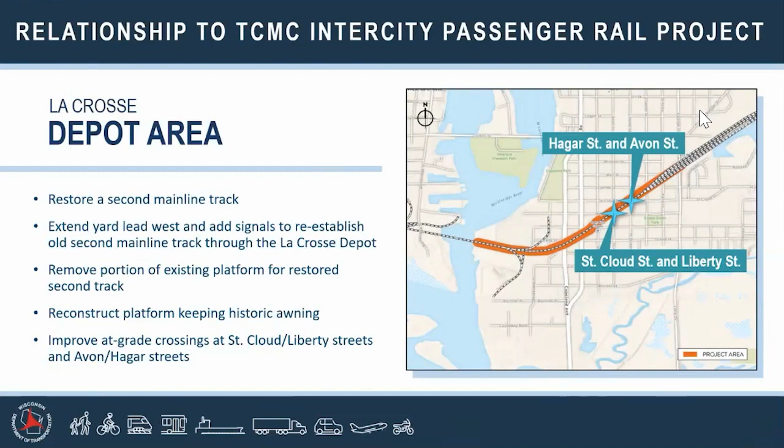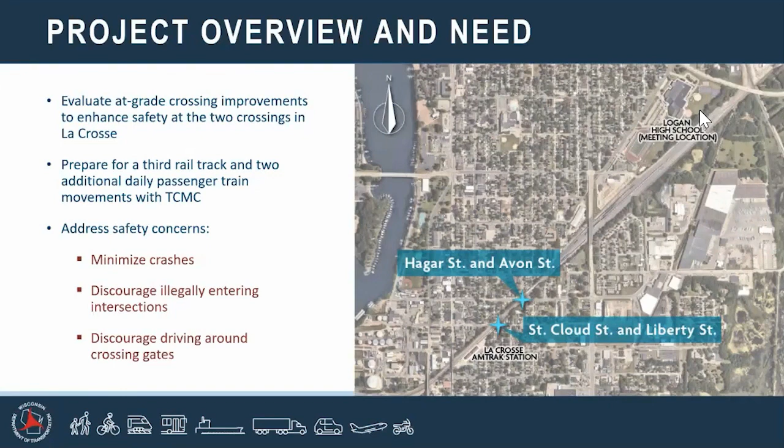So coming back to these at-grade crossings specifically, Chris, I know you're going to talk a little bit about some of the existing conditions and characteristics, but when we were out there, a lot of the folks understood that these two at-grade crossings have some safety concerns. We understand that the rail traffic is blocking these crossings. In talking with CPKC, we recognize some of that. They're also uncontrolled intersections right now. So with that, I'm going to turn it over to you, Chris, to talk a little bit about those existing conditions and characteristics.

One of the biggest important things about these two intersections is, as you know, as local residents, they're neatly sandwiched between a station and a yard. So you've got a lot of train movements. And so that's one of the primary things we are dealing with as we talk about these crossings and the safety issues that we have and the solutions that we are looking to identify.

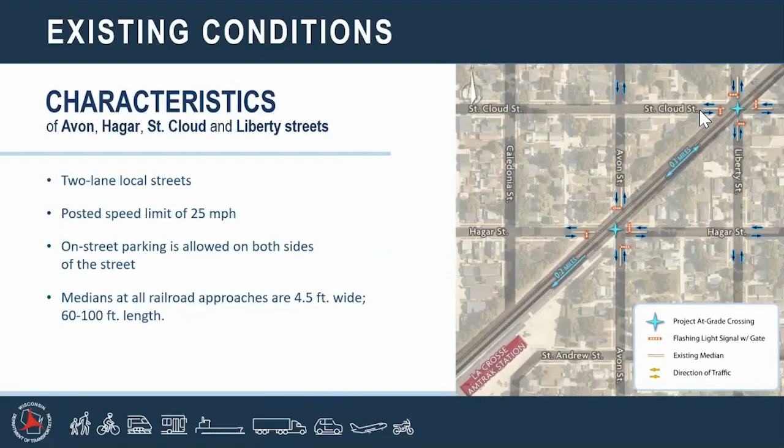We're talking about a residential grid, as you know, 25-mile-an-hour streets. As Aaron mentioned, no stop signs right now. Parking is allowed. There are medians. Currently they're in the range of 60 to 100 feet long. That doesn't tend to necessarily deter people from driving around those medians because they recognize, oh geez, if I don't race around that median, I'm going to be waiting here for minutes at a time. So those are some of the things that are in the existing geometry at both of the Avon Hagar, Liberty St. Cloud intersections.

What also is there from a railroad safety standpoint is there are lights and gates at each of these crossings. In each approaching direction, there are gates, as you know. No wayside controls. Down below here on the slide, you see a little statistics about the traffic. And you can see Avon Hagar and Liberty St. Cloud, the numbers there. I won't go through them, but you can see them. And as Aaron said, you can access these reports after the meeting if you wish.

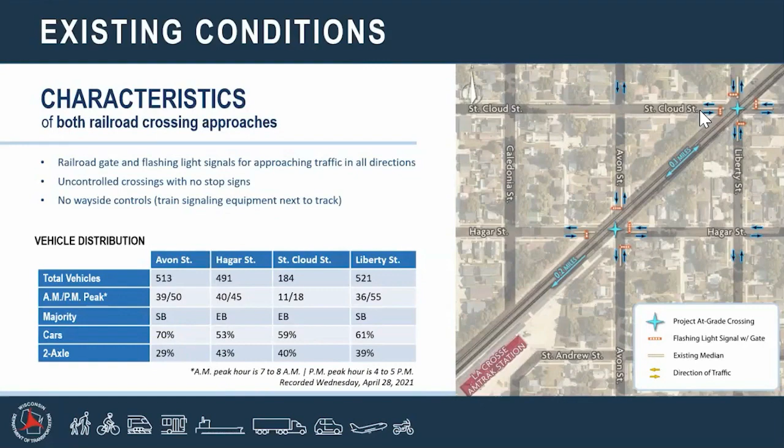Now going into the railroad conditions. As you know, there are many activations. Joanna Bush was the engineer that did this analysis for us. She couldn't make it tonight, as Aaron said, but she worked with the railroad to get some really compelling activation data, meaning she wanted to look at how often those lights and gates are going off, and how much during the day is that happening? How often are those gates down and closed? And the numbers are pretty compelling.

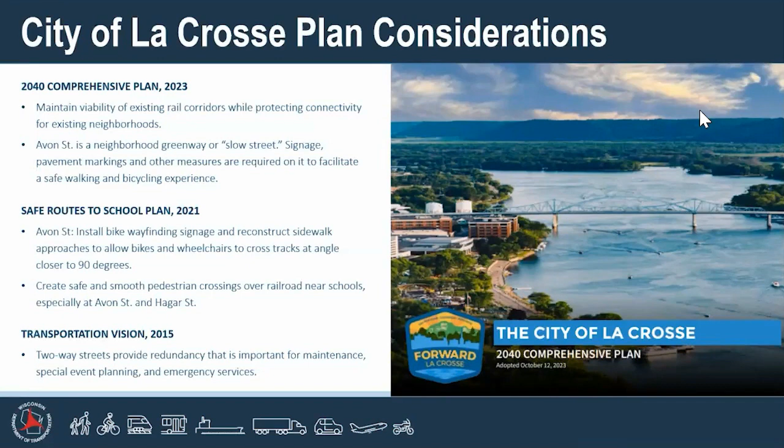Okay, so what we'll do next is we'll step into the alternatives that we've identified. And as we talk through this, I want to remind you that these are ideas, these are conceptuals. We're not really advocating any of these particular solutions. We are open to your favorable, your negative comments on these solutions. We're open to different ideas.

Another important concept is it could be that any of these ideas on its own isn't solvent, and maybe it might be a combination of two or more of these ideas, such as maybe you throw in a crossing closure at one spot and a 4-quad gate in another. But I just want you to keep those concepts in mind: we're totally open to your thoughts and ideas on these concepts.

One thing that we'll touch on that's kind of broad and global about any and all of the options that we would consider is that, for instance, when we think about pedestrians and bikes, one thing we unilaterally will think about is trying to square up those crossings as much as we can, because there's how many bike accidents happening at these crossings that we're not aware of, that are not on our number sheets.

It probably happens quite often that people get, whether it's the bumpiness of the crossing or whether it's the angle of the track and the tire snagging it and sending you down. We recognize these crossings have those angles. And so any solutions that we would think about, those are considerations we would put into our ideas.

Detectable warning fields, that's a standard. I don't have a picture, but you've seen them, the yellow rectangles at crosswalks that have truncated domes, little circles for people that can't see as well so they can feel their way around. Those are standard, and those are things that we would incorporate into our design.

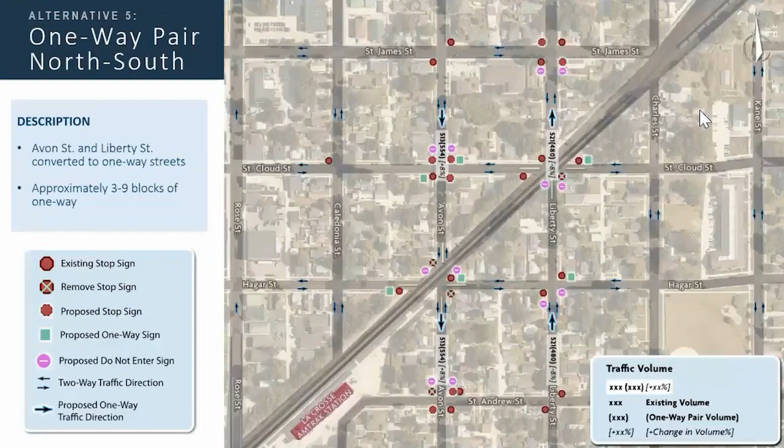Moving on to alternative 5, this would be a similar concept, but thinking about the north-south direction. Liberty Street would be just northbound, Avon Street could be just southbound. Same sorts of considerations, same sorts of pluses and minuses. We think it would be a safety increase, but there would be concessions made, again, extra driving times, and perhaps not solving all of the problems that we're looking to solve. But we think it could be an alternative to consider, or part of an alternative to consider.

Alternative 6, again, almost combining these two ideas: we're not just thinking east-west, not just thinking north-south, but combining the east-west and north-south into a more comprehensive one-way, we're calling it a one-way pair network, where of course, I think you can get the idea, traffic, instead of being bi-directional, is going only one way on the street. And so again, very, very similar pluses and minuses to this sort of consideration.

Alternative 7, this is the alternative of closing one of the intersections, and our recommendation is, if we are thinking about this consideration, we'd probably focus on the Liberty St. crossing as opposed to Avon Hagar due to the lower volumes, I would say. So that would be where we would focus. Notably in this alternative, it would be closed to vehicular traffic, but of course, we always have to be thinking about those pedestrians and bikes. So we would not close it to pedestrians and bikes.

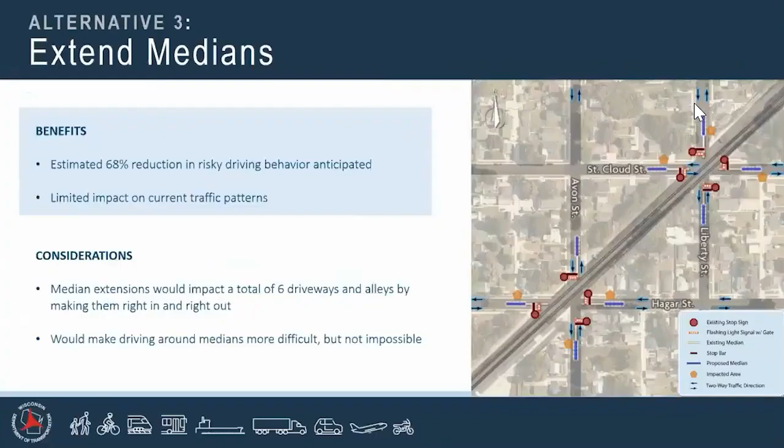So the question is, have we already started considering some of those crossing angles for the pedestrians? Everything that you've seen today has just been primarily a concept. I think what Chris has alluded to, some of the global design considerations that the project's ultimately going to deal with, is looking at exactly that. When we get into something that really needs to be constructed, how best can we make those angles appropriate for bicyclists and pedestrians?

And if we can't, what are other safety measures that we can do to help them with those types of things? Because the crossing surface is going to get longer, right? I think we've both been out there. We see that the crossing surface isn't quite as wide as probably what the users are using with the hard new concrete surface. That is one of those elements that we are going to take care of as part of our overall project.

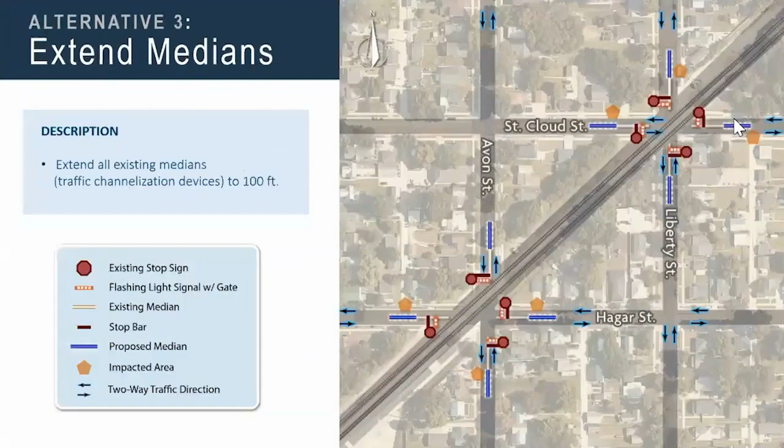Yes, if the streets are made one way, would it just be near the track or the full length of the street? In those alternatives, I think the effects would extend out a few city blocks in each direction. Let's see if I can pull up one of the... Yeah, I believe it was 3 city blocks in each direction, roughly. It says approximately 3 to 5 blocks in the one-way pairs. So for alternatives 4, 5, and 6, alternative 5 is the north-south pair, alternative 6 is the combination of both. I think the approximately 3 to 5 blocks of one way applies to all 3 of those.

Yes, sir, up front. There's 3 major roads that are used in this area, Copeland, Rose, and George. During rush hour, Avon and Liberty are both alternatives for emergency response vehicles. So if you're going to be doing anything here, hopefully you would speak with emergency response people in the city, because if you turn any of these into one-way streets, that's going to totally adjust their time for service or the route they take. And to that comment, I think that's why the City of La Crosse is a stakeholder in this, and that's why they're being coordinated along with this whole process. City of La Crosse's representatives are here this evening.

Just to repeat the comment for those of you who didn't hear, the first comment was regarding the trains, CPKC, the rail operator and the switching movements, and what control do we have, or what responsibility should the railroad have to do a better job of not blocking those crossings? I don't know if I have a great answer for that in any crossing in the state of Wisconsin, to be honest. There are state statutes. Oftentimes they don't get litigated because ultimately the rail companies prevail. I know that's not welcome news, but that's part of the reason why we didn't focus on those alternatives, is we don't have much control over that. Not to say that we'll ignore it. I think it's a great point and something to consider. Could the train operations change? Aaron and I and the project team don't have much control over that. I don't know how else to confront that.

Along with the stop signs, which I think are a good idea regardless of whatever you do, just to get people from, like they said, they'll barrel through no matter what. So if we had stop signs, that might deter, but people are still gonna be stupid regardless of what you do.

If we go with alternative 2, which I think is the best option, can we have those medians removed because they don't deter nobody? People still go around them, even if you extend them, and it just messes with people's ability to get into their driveways and stuff. So if you add these extra gates, can those medians be removed? It's just gonna alleviate a lot of hassle for snow plows trying to get through, emergency vehicles, just in general. I would throw that as a consideration for alternative 2.

So the question or the comment is, as part of alternative two, can the medians be eliminated if the quad gate system is implemented at both crossings? I think it's definitely something that can be looked at and considered. I know it's not showing up here as part of this alternative, eliminating the medians. It would really come circling back to the quiet zone requirements for these at-grade crossings. It's now a quiet zone. But when they were doing this

before, when they put the medians in, that was part of keeping it quiet. One of the options was no median, just add extra gates. So I feel like that should still be on the table for a quiet zone. Okay, all right, we'll just make a note of that. I know it wasn't shown in any of our alternatives, but definitely something that can be considered in the final design.

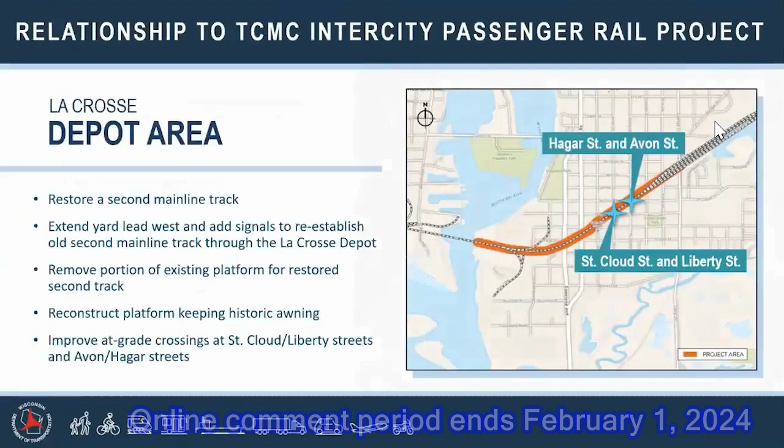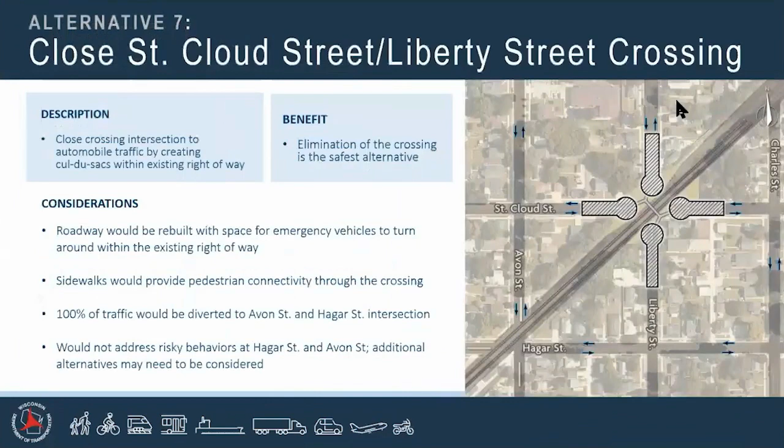One comment about the alternative. I know Jerry mentioned that he thought it would be good to have the warning signs a couple blocks ahead. I live right on Avon Street, just south of the Avon Hagar intersection. If those lights start going, people don't take an alternate route, they floor it. If you put one of those things 2-3 blocks ahead, all they're gonna do is floor it in the neighborhood in order to get through. They're not gonna take an alternate route.